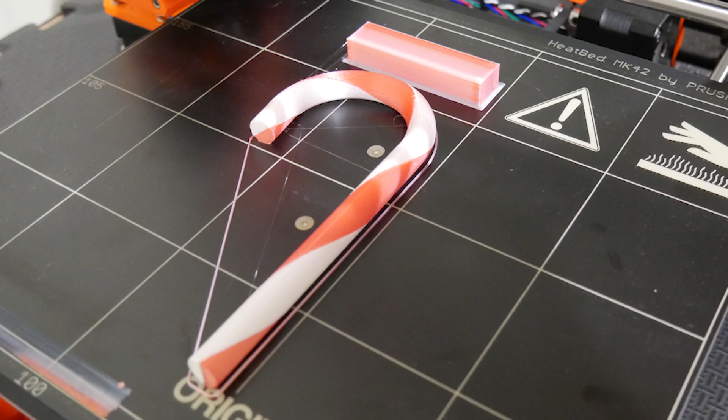So in this CAD for Newbies tutorial, we're going to talk about the sweep function within Fusion 360, but we're not just going to talk about it, we're going to do a project. Specifically, we're going to create this. This is a dual color 3D print printed on the Prusa i3 Mark II with the Multi Material Upgrade. So it's printed in two different types of PLA, and I'm going to walk you through how I drew it in Fusion 360 and how I printed it.

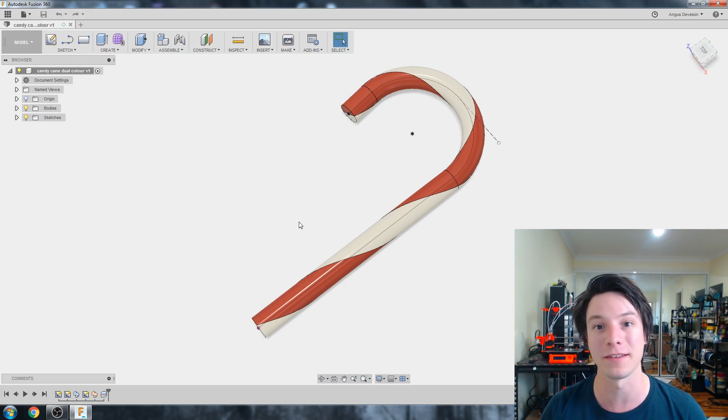So here's my candy cane in Fusion 360, and you'll notice down the bottom left, it's extremely simple. And this is created using the sweep feature. So the sweep feature in Fusion 360 is extremely powerful. Previously, we talked about using revolves, taking a sketch and revolving it around an axis. Well, the sweep takes a sketch, and instead of revolving it, it actually sweeps it along a defined path. So a sweep has two components, the sketch or profile and your path. Two different sketches that are involved to create your sweep feature.

So let's start a brand new sketch, new design. And as always, you want to create a new component just in case you're going to make a complex assembly of candy canes. It's not necessary, but it is good practice. So let's go to new component, assemble new component, and call it candy cane. So we're going to start with a sketch. As always, create sketch, and I'm going to select my top plane.

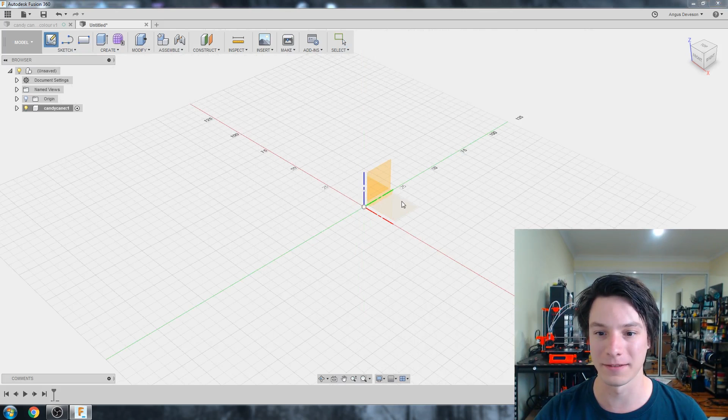So what you want to define for your candy cane is how long you want it. So for these ones, I went with about 150 millimeters in height or so, maybe 140. It does depend on your 3D printer. And we're going to draw it with L for line. Draw the line up. And escape. And then we're going to draw an arc. So go to sketch and arc. For this, tangent arc actually works quite good. It works by just clicking the point, holding down and dragging it out.

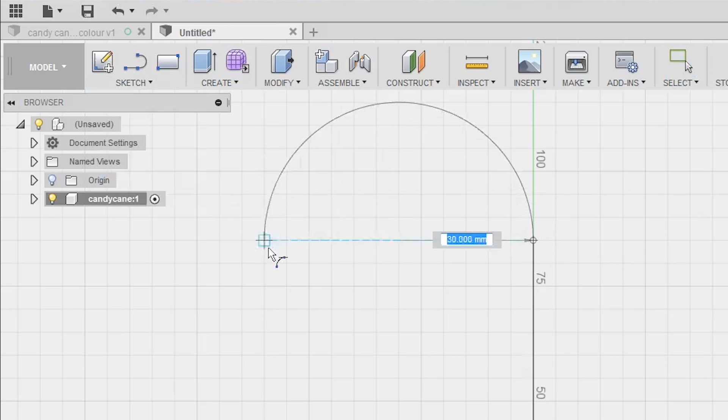And candy canes have that sort of a characteristic hook on them. So to do that, I'm just going to draw it a bit like this. That's fine. And then I'm going to hit L again here, and then just drag it out slightly to an angle. So you notice it wants to do a constraint for directly vertical. If you're not familiar with constraints, please do view my 3D CAD for Newbies constraint video before you watch this one. Otherwise, you might get a bit lost.

What we just did there is we created a tangential arc from our line around here to our line here. And from here, it's just about tweaking it to make it kind of look like a candy cane, whatever you're comfortable with. And just for a little bit of a pro tip, if you're trying to define the entire height of the candy cane, it is actually quite easy to do, but we will need a construction line. So hit L for line, drag it across here, escape, and then I'm just going to turn it into a construction line by hitting X.

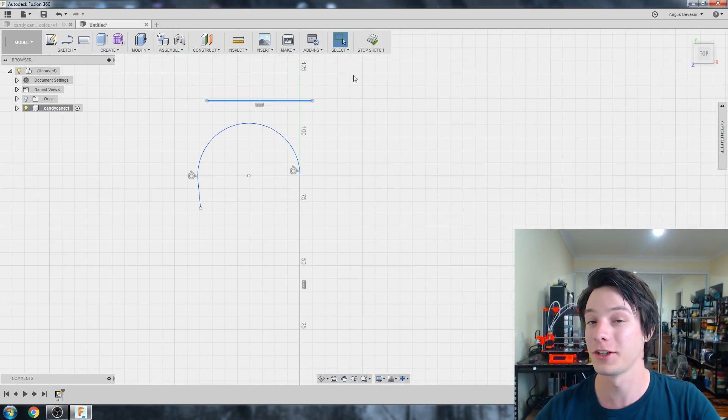So this dashed line here means it's not part of the final geometry, it's just used as a construction. We've talked about construction lines before in previous CAD for Newbies tutorials, where we use them for axes and various features to help geometry, but it's not involved directly in the geometry, if that makes sense.

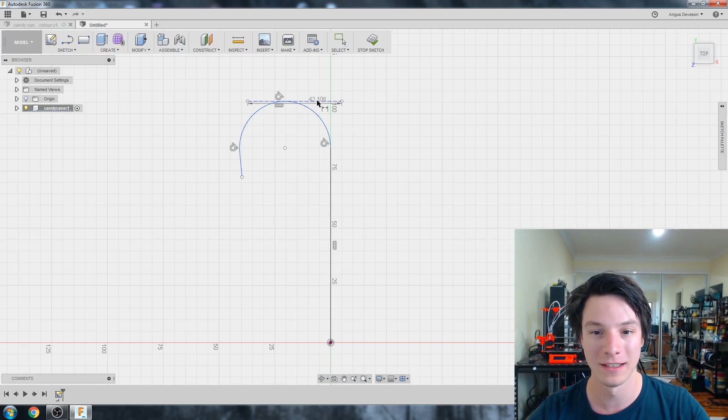So what we're going to do with this line is use it to define our overall height of the candy cane by selecting it, then holding down Shift, selecting our arc, right click, and then we want tangent. So what this does is our construction line is locked to the horizontal, and it's also tangential to our arc. And you're probably already guessing how we're going to use this new construction line. Hit D for dimension, and then select the two, like that.

So we've selected our construction line and the point at the bottom of our candy cane, and now we can define the entire height of the candy cane. So I can make this 140, like so, and it updates. Excellent. And now I'm just going to drag this arc around to get a good idea of where I want it. That makes sense looking at the candy cane. It needs to be quite a bit bigger.

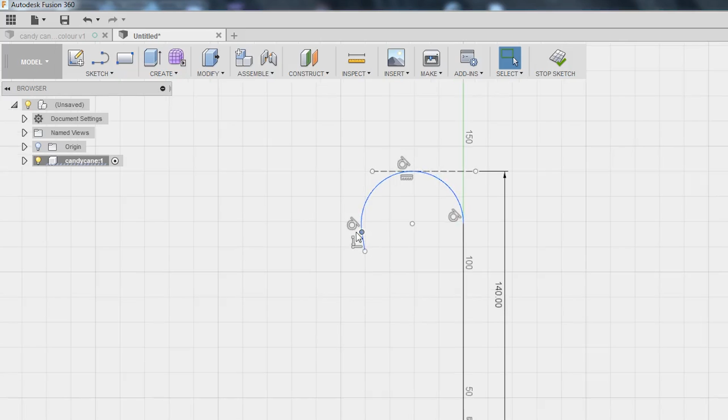You can actually define the angle of our little hook. I might do that here. I'm going to click the two lines there. And let's just go with 5. Yeah, it's exploded down there. So that's our dimension for the angle of our little hook. And there's D for dimension again. Let's make our radius 30.

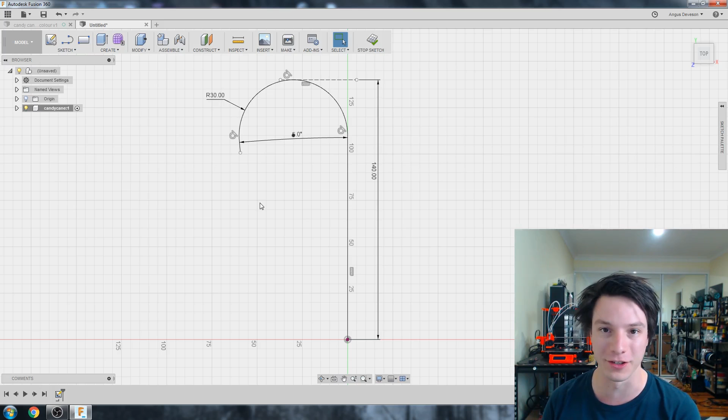And don't forget, guys, we're drawing with a feature tree, so you can always go back to this sketch and change dimensions. You can update your project as you go along, so don't stress too much about getting this exactly right the first time. But I'm pretty happy with that, so I'm going to hit stop sketch, and that's the path for our candy cane. You can draw the profile first or the path first, it doesn't matter, but remember every sweep needs a profile and a path.

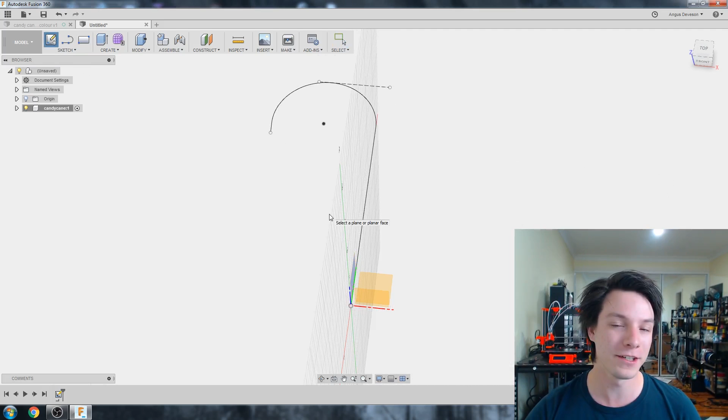So let's draw the profile next. I'm going to go to sketch, and the features of a sweep are important. You need to have it trace a path, so deciding where you draw it on the path is very important. You can't draw a profile on the same plane as the path. You need to draw it perpendicular to it, because it's going to sweep through it. So I'm going to hit the front plane here.

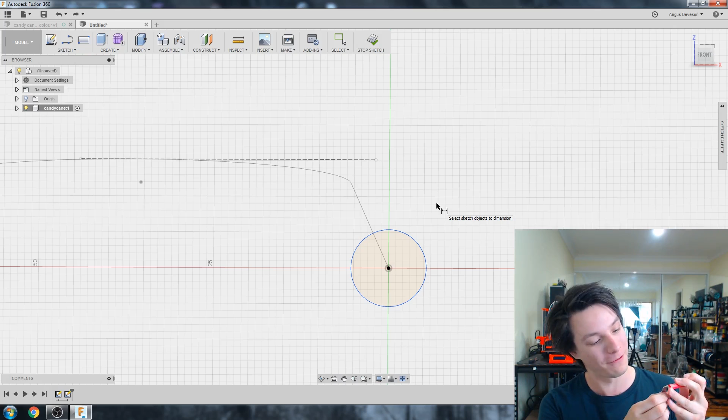I'm going to go to C for circle and make sure I'm selecting the right point here, and I'm basically just drawing a circle. Of course you're going to want to define the diameter of your candy cane stalk, the diameter of that circle. I don't quite remember what I used; I think it was 10 millimeters. So hit D for dimension and 10, just like that. And again, profiles can be very complicated if you like, just like we talked about with revolves, but it's important that they don't intersect each other. So I'm going to hit stop sketch here.

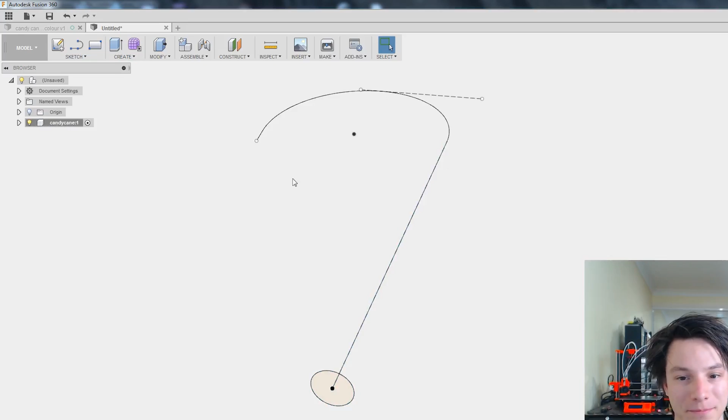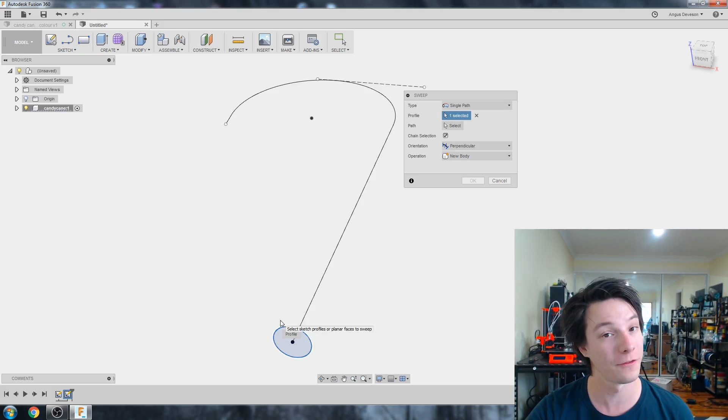Okay, so we've got our profile, which is our circle, and our path, which is our line work here. So we're going to go to create, sweep. The sweep window gives you various options. We have different types: single path, or path and a guide rail. I'm not going to talk about guide rails too much in this. It helps you control how the profile sweeps through. It's more of an advanced thing worth talking about in a future video. We're just talking about basic sweeps in this one. So for my profile, I have my circle, and for my path, I have my candy cane.

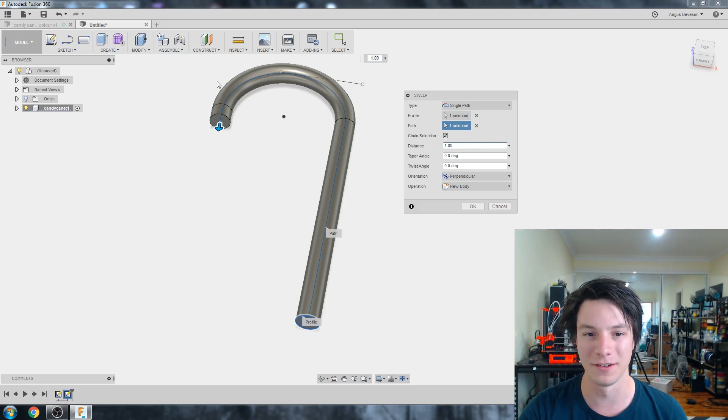And there we go. What this has done is taken our circle and pushed it through the candy cane all the way to the end. Now you can define how far along a path it goes. Fusion 360 will let you say how far the distance is, but I want it to go all the way to the end. So distance 1, I assume that means 100%, so it goes all the way to the end. Then we can do a few different things to modify it. Fusion 360 has been very good at updating the control we have over sweeps.

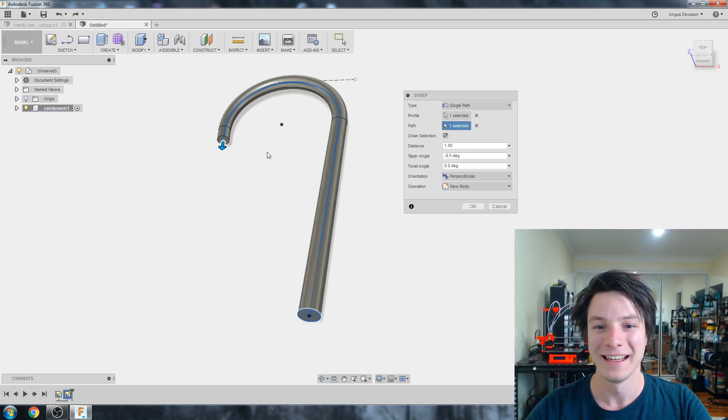So we have taper. With our taper angle, we could make it go fatter, 0.5 for example, so it gets slightly fatter towards the end, or minus 0.5, it gets thinner. That might be good for a tentacle or something along those lines. But I don't want a taper angle here, so 0. Then you have twist angle. We're going to use twist angle for our second feature to give our candy canes these lovely twists, but for our first sweep, we don't want to worry about that. Then you have orientation. Now this is important. Do you want your profile to follow the path, perpendicular, or do you want it to remain parallel to its original point?

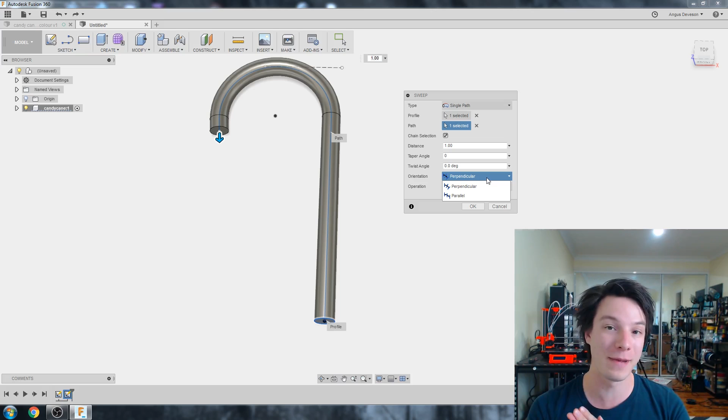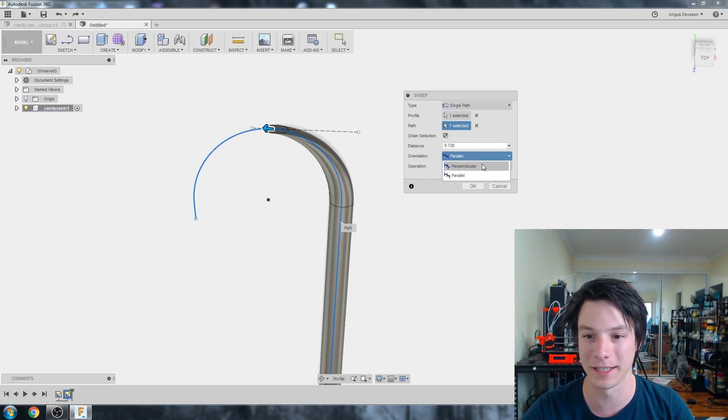Now here we can say parallel, and it's not going to work. But a parallel is exactly what it says. It stays parallel to its original sketch. So maybe you can make it work up to this point. Yeah, here we go. So here you can see with parallel, it's sort of crushing out because the circle is not following perpendicular to the line. Whereas if we make it perpendicular, it will stay and trace around our sweep like that, which is exactly what we want for a candy cane.

Alright, I'm pretty happy with that. So I'm going to say okay. And that is our sweep. So it's taken 2 sketches and 1 feature to create the outline of our candy cane, just like that. But now we're going to do a bit of a power move. How did I make it look like this with a twist using a dual extrusion 3D printer? Well, I used something called the patch workspace.

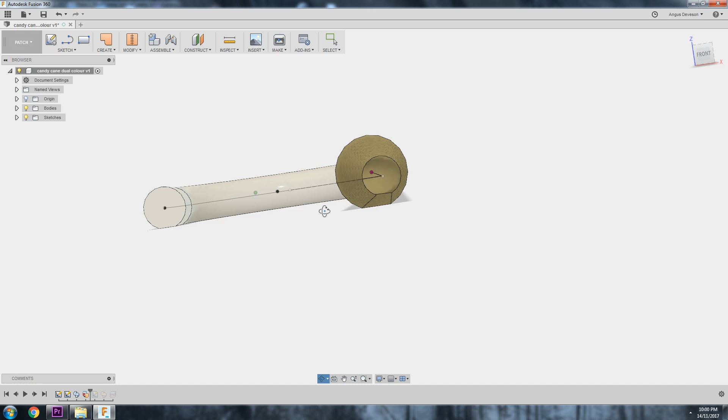So the best way to explain patches are 3D surfaces that don't have any thickness. They're 0 thickness. So if you imagine this candy cane was completely hollow, this was just a surface on the outside, like a tube, that would be made up of patches with no thickness. So you obviously can't recreate patches in the real world unless they become a solid volume, but they're extremely powerful for modeling. You can create very complicated objects using the patch workspace. So we're going to change over to that. Let's go to model and patch.

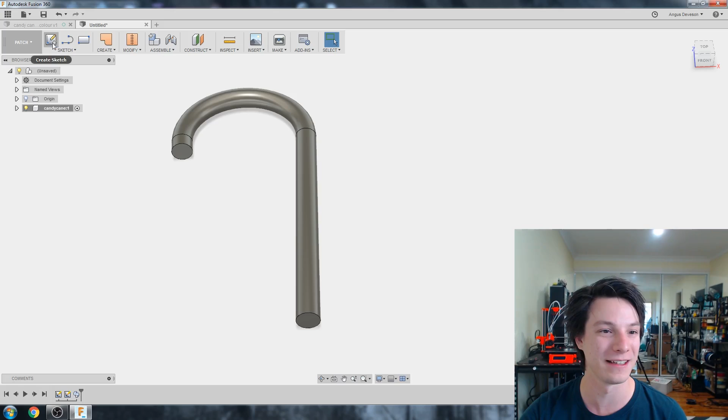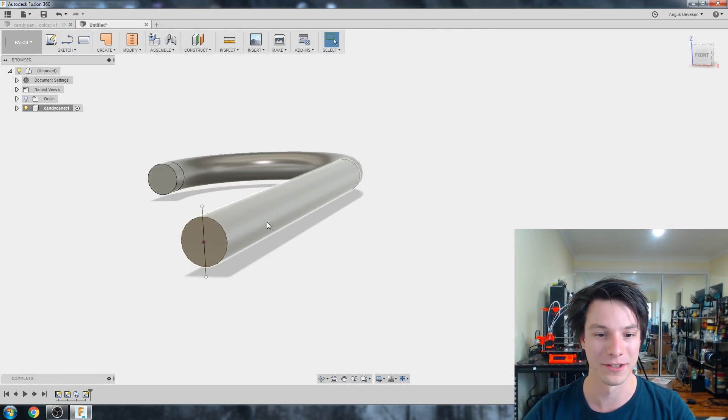And we're going to use the patch workspace to do another sweep, but this time we're going to sweep a single line. Yes, watch. So what we're going to do is create sketch, go back to our first front plane, or just select the end of the candy cane. I'm going to hit L for line and just draw a line like that. Just make sure it stays midpoint. So I just selected both and right click midpoint constraint. So it's just going to stay locked to our shape. I don't care if it extends out a little bit, that's actually fine. Stop sketch.

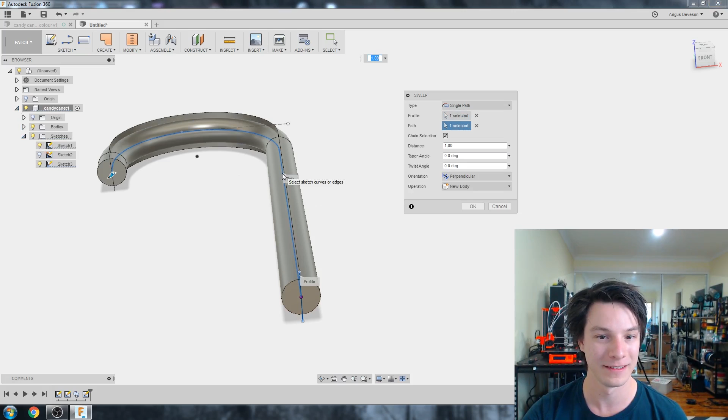And we're going to use this line to sweep along our candy cane. So create and sweep. And because we've already created a path to create the candy cane in the first place, we can reuse that path for our patch sweep. So profile is just a line, and path is going to be, if I turn on our sketches, there we go, our path.

Now this is important to note the differences. In the patch workspace, you can sweep just lines into these patches, these zero thickness surfaces. In the normal modeling workspace, you cannot. A profile has to be fully enclosed, like a circle, square, whatever random shape. It has to be completely enclosed. Whereas in the patch workspace, it doesn't. We've just swept a line around our candy cane just like that, all the way to the end.

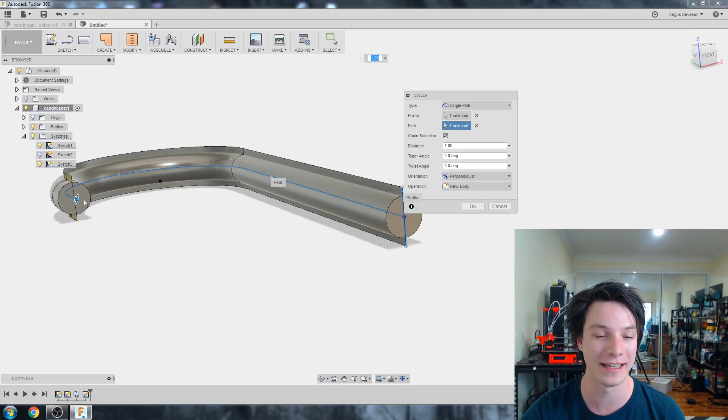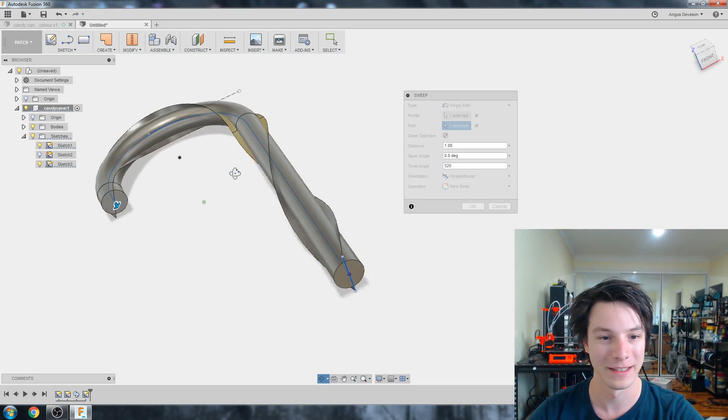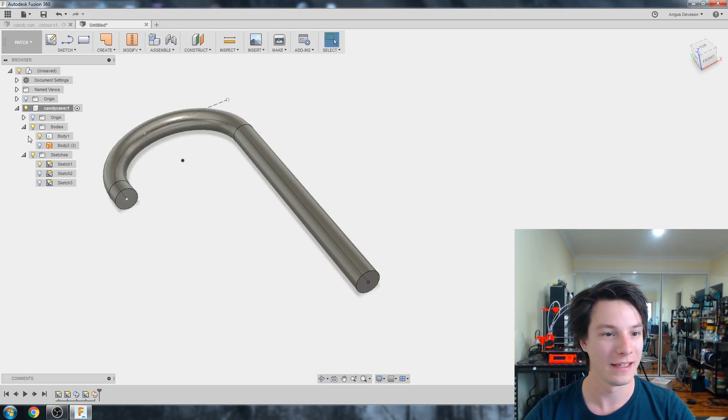But now we can use the other modifier we didn't touch before. We can use twist angle. Let's change this to 15. Okay, that's twisting a little bit. What about 360? That's twisting around once. What about 520? It's twisting around a lot now. And you can see how I use those twists to get that shape. So you can go back and change this, but I'm going to try 720 and see how it looks. And it is a new body. So what we have now is our candy cane here and our patch sweep, which is twisted here.

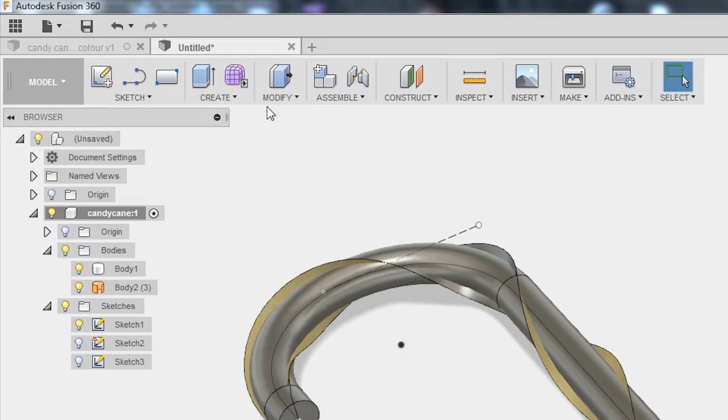Now patches are very, very powerful, and how I use them a lot is to split bodies. And we're going to use our twisted swept patch to split our original candy cane into two separate objects. So to do that, I'm going to go back to model and modify, and if we go down, you can see split body here. So body to split is our candy cane there, and splitting tool is our patch. Okay, and we hide our patch, and we've now got our candy cane split into two bodies, just like that.

Okay, so what we have is our two bodies here, but to help you define them and visualize them a little bit easier, we're going to give them some appearances. So we're going to give them some colors.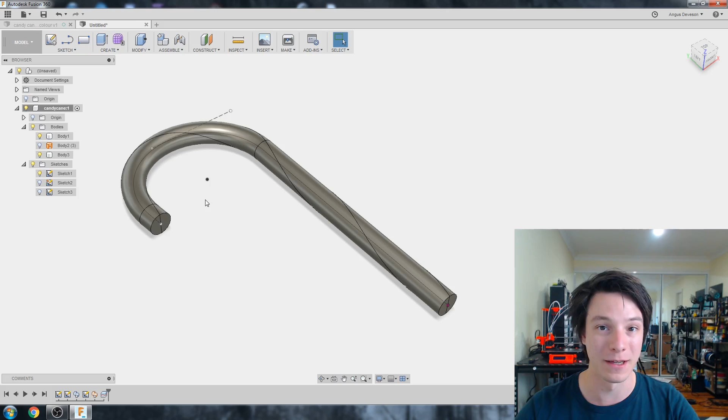So I'm just going to right click here, just not on the part, just next to it, and select appearance. And then this window pops up, push it over here. So Fusion 360 has like downloadable materials. I'm just going to turn that off for now because I don't really want to download anything fancy. I just want to go to some colors. So I'm just going to go to plastic and opaque.

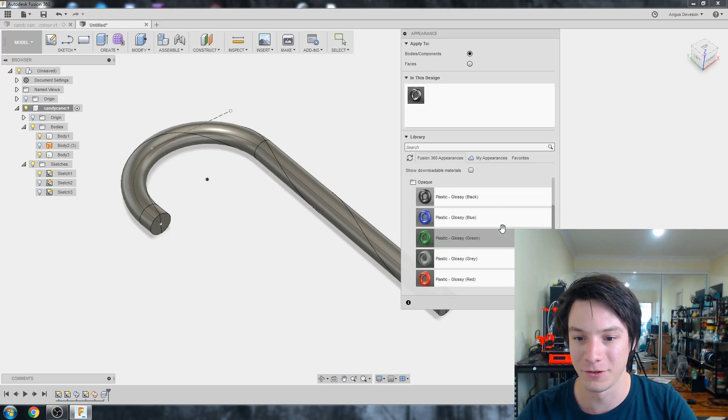And I'm going to drag over a red to one of them. Doesn't matter which one. Let's go with that one. And a white to this one. Just like that. So I have it applying to bodies, not faces. You can do it to faces, individual parts of a component, but I'm just doing it to a body. Just like that. Close. And that's our candy cane.

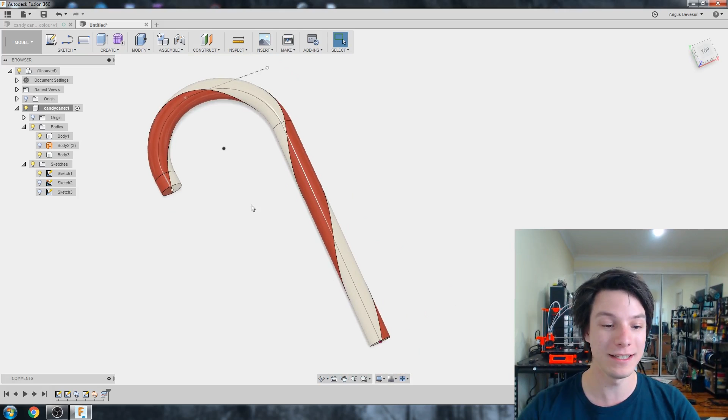Just like that. So let's say you wanted to give it more twists. You can go down the bottom left, right click our sweep, edit feature, and let's give it even more. Let's give it like 900. Like that. Even more twists. I mean, you could go absolutely crazy and do like 1,500 maybe. Like heaps. So you can really define how you want your candy cane to look.

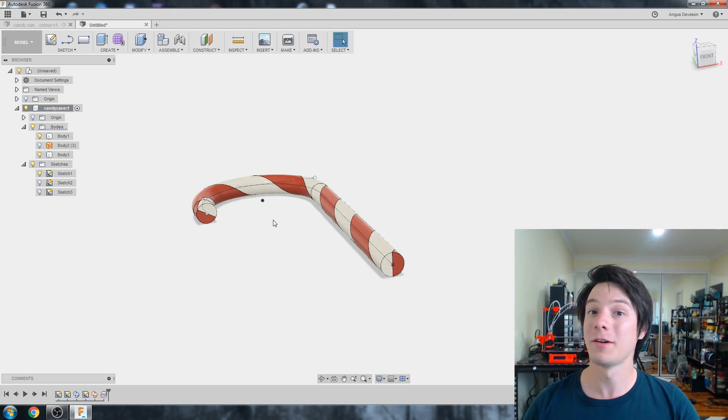Now some of you might be wondering from a printability standpoint, how do you print this? I mean, it's rounded on the bottom. There's no way for it to stick to the build platform without a raft or supports. Well, what I did with mine is I gave it a little flat spot just to help it stick down. And all you need to do to make this happen is edit your original profile. So all we're going to do is right click our original profile, edit sketch.

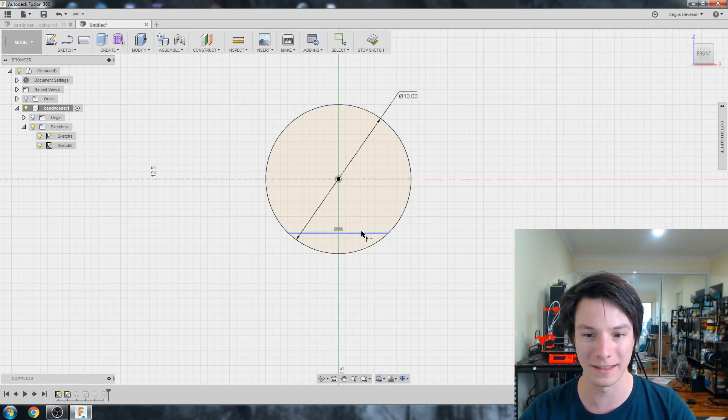I've got it here. I'm just going to draw a line across like that and define just how far I want it from the bottom. You know, something like that. So maybe make it 5.5 in length. That's totally fine. And again, Fusion 360 is smart enough to know you can define separate boundaries and separate profiles. So it's just split it in two.

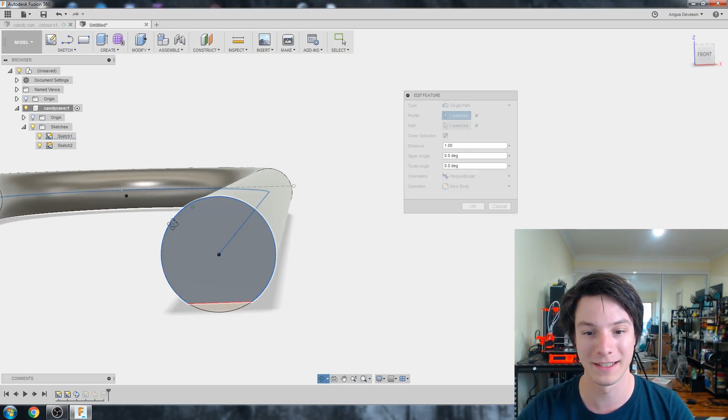Stop sketch. And I'm going to right click my original sweep. And it's automatically added two profiles, but I'm just going to unselect the bottom one. Simple as that. So now we're just sweeping a profile with the flat around instead of the complete circle. Okay. Everything nicely updates. There's no errors. And now we have a flat bottom for our candy cane to help it stick down to the build platform.

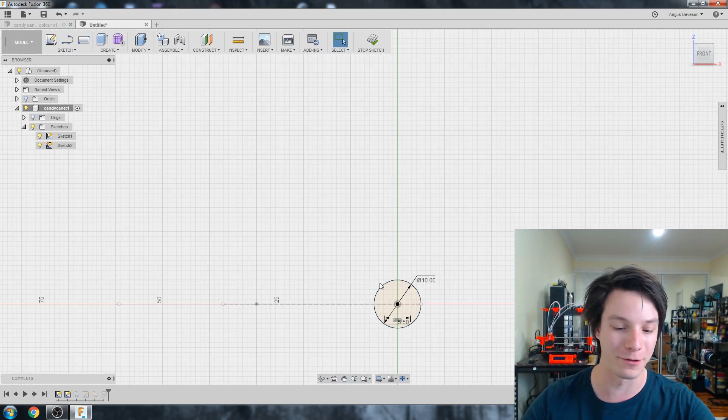But before we send this to the 3D printer, let's quickly talk about where sweeps can fail. So let's say, for example, you wanted a massive spike out of the side of our profile. So I could just draw the line, this huge spike like this. And I wanted that to be part of the sweep. Now you can do that. You can do any profile you like in a sweep, but it can't intersect with itself. There's a certain minimum radius that a sweep can go around.

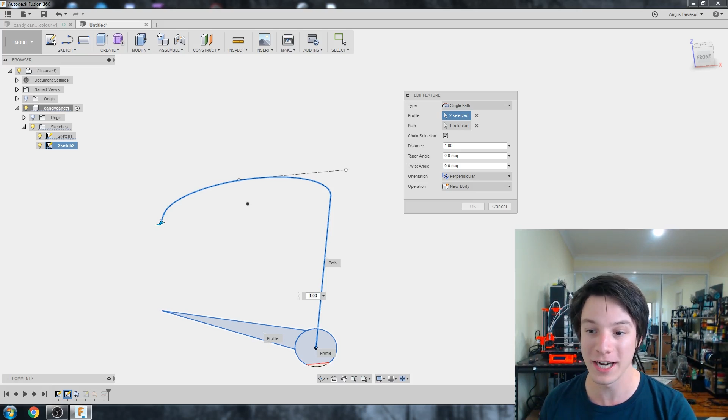So if I hit stop sketch, and I go to my sweep, edit feature, and I select this line, it fails. And it's failing because it cannot sweep it all around. Actually, the error says, this sweep could not create a valid body. Try changing the profile or path or adjusting the operation values. So there will be a certain size I can adjust this spike to make it work. Edit sketch. Let's make it maybe that size. Stop sketch. Then I'll try adding it now. Edit feature. There we go.

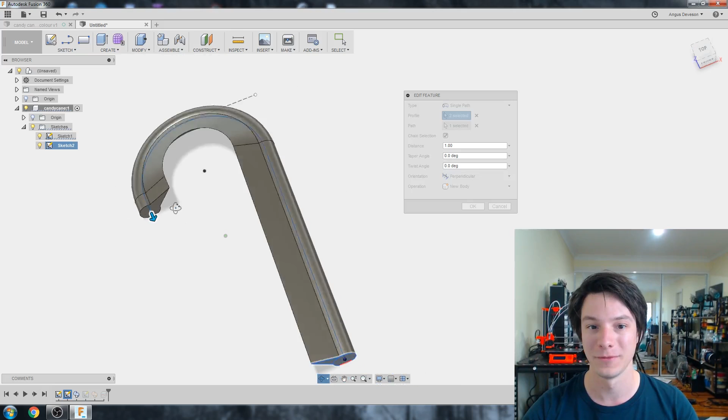So that worked, but any larger, it starts to intersect with itself, and if it intersects, because of this radius here at the top, it's going to fail. So keep that in mind when you're making sweeps. If a sweep fails, it's almost always likely that it's actually intersecting with itself. Similarly, you can actually go too crazy with twist angles. Like if I try to do this massively twisted, oh, it actually works. That looks absolutely nuts. But you can go too far with twist angles where it will again intersect itself.

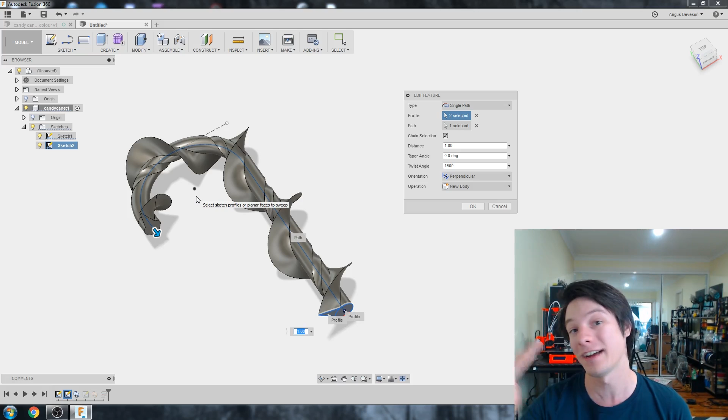Similarly, see it's going around here, and if it had a huge spike out on the outside of a radius going round and it started going into the radius, it might fail there as well. That looks like a crazy corkscrew. Anyway, cancel. I don't want that. So that's how sweeps can fail. If you have a sweep that's failing, that's why it's happening.

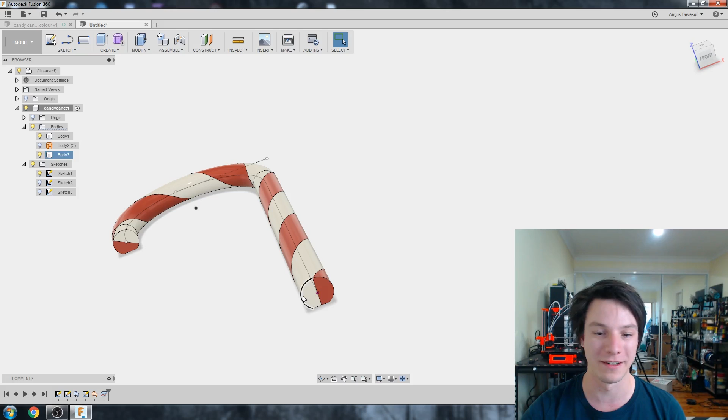Or you've drawn the profile actually inside, like instead of being on the line, it's inside, or it's intersecting in some form. So the easiest way to do it is to be touching the path. It doesn't have to touch the path, but that is the easiest way to draw a sweep.

So I'm going to save this off as STL. Simply select the body you want, right click, save as STL, and I'm going to save this off as a white candy cane part and a red candy cane part, and then I'm going to chuck it into Prusa Control to print it on the Multi Material Upgrade Prusa i3 Mark 2S. That's the one, let's get going.

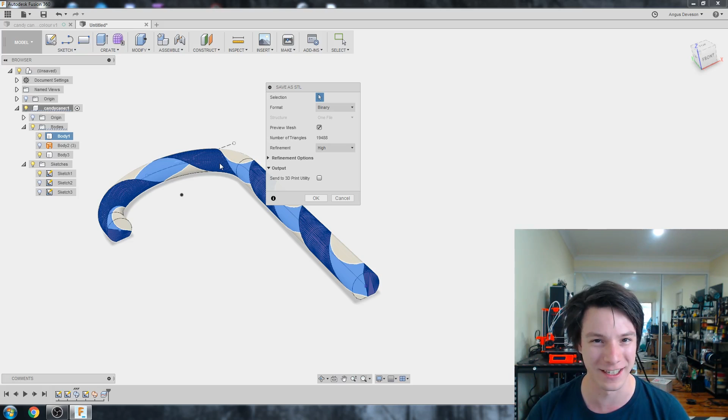Okay, we're in Prusa Control, which is fantastic for multi-material printing on the Prusa i3 Mark 2S Multi Material Upgrade. I'm going to make sure I have settings selected for the correct machine, which is the multi-material, and I think it's a 0.4 nozzle, not 0.6. File, import multi-print, multi-part print.

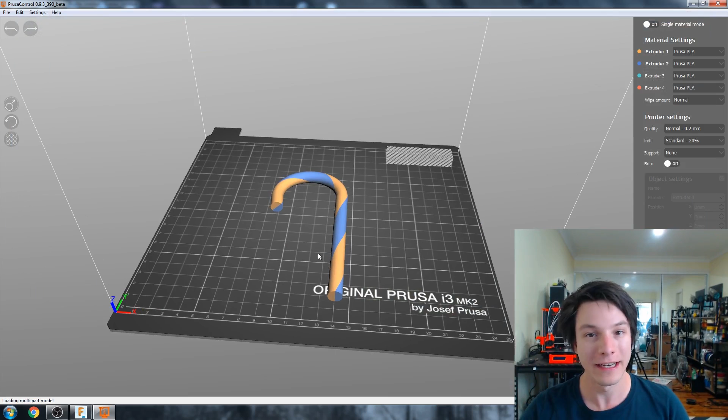So here is my candy cane multi-part print in Prusa Control. It automatically nests them together properly because they are exported with the same origin, so it knows exactly where to put them. And we're going to print these multi-colors.

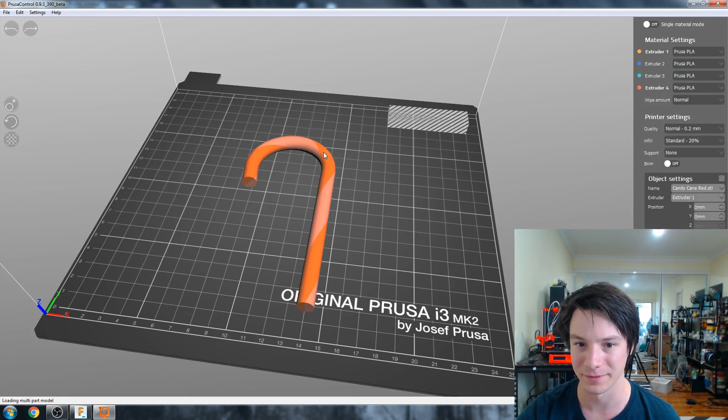So you can define the extruder that you want. So extruder 1, and then extruder 2 is what's defined, but I want to change one of them to extruder 4. So I'm just going to select down here, extruder to extruder 4, like that. That looks good to me. So I have on my machine loaded up a white and a red on the 1 and 4, so that's why I've defined that. That's usually the hardest part of getting the right extruders.

And then you have your purge block. Now the purge block's over here by default, but I just move it a bit closer. For this, it seems to work fine. 0.2mm layer heights is fine, and no support.

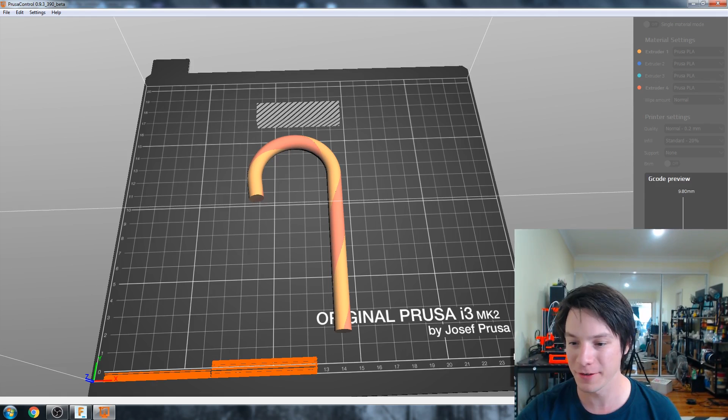And we're going to generate our G-code. So it's saying 2 hours and 14 minutes with 5.4 meters of filament. And you can see here, we've got our multi-material printing with a purge block. And we're going to send that to the Prusa.

So the Prusa multi-material upgrade for me has been pretty much flawless. I did have one semi-jam, but that did clear pretty easily early on. It does take up a lot of space. You have 4 spools, and the spool holders aren't that great. I'll be completely honest that the rolling resistance is quite high. But I have to admit, I had a lot of pessimism on multi-material, multi-color printing because it was such a pain to set up with dual nozzles and lining them up.

And the purge block in this system is a waste of filament. I mean, you get a purge block like this for a design like this, and it's solid plastic. But the final result is awesome.

I'm so happy with how well and clean the lines are with this design, especially considering I wasn't sure how fine each little part would be, each layer, because it twists around. There's little islands of color as it goes around. So I'm not sure which one I like more.

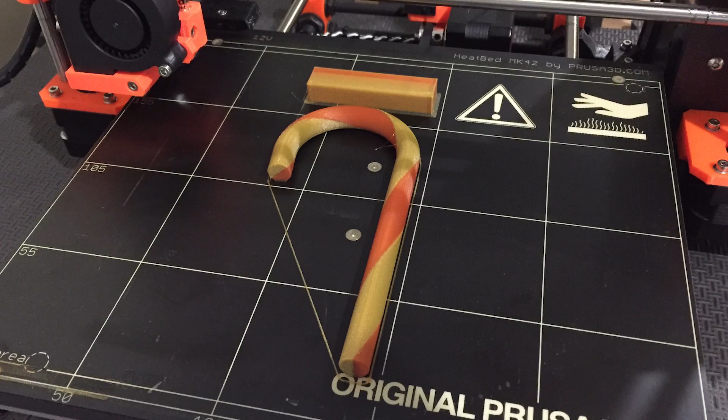This is the one with the colors that came with the Prusa, which is gold and a sort of an orangey red, which is Fillamentum and Prusa's own filament. But this is the polyalchemy one, which is like a shiny white with a shiny crimson. Not sure which one. They're both very Christmassy though. Not sure which one I prefer.

But there you have it, guys. That's how to create a dual color candy cane, using Fusion 360 and sweeps. And I hope you found this video useful on how to use sweeps within Fusion 360. They're a very powerful tool for creating objects like pipes or tentacles or candy canes.